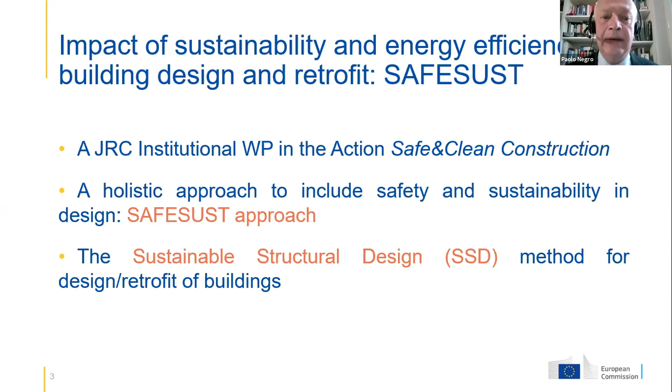Also, we developed what we call a Sustainable Structural Design method, SSD, to combine sustainability and seismic safety in the design or rehabilitation of buildings.

Everything moves from the availability of life cycle analysis techniques. I will not spend many words on the importance of life cycle analysis, because I noticed that Professor Toenti will cover in detail the impact of our industry on the environment.

Dealing with life cycle analysis means using a set of tools which are readily available to label the result of our design, our building, in terms of environmental performance.

The key issue as for LCA procedures is that they are all based on different criteria. There is a general lack of interoperability between the different criteria. Applying those procedures is somewhat long, requires a lot of expertise, and I might claim it is difficult. And more importantly, the application of LCA procedures is done a posteriori, at the end of the design process.

You design your building, and finally you run your life cycle analysis, and you get your label in terms of performance. If you have done a good design, you might be a gold designer or even platinum design. Differently, we stick with a silver label. This is not suitable for design.

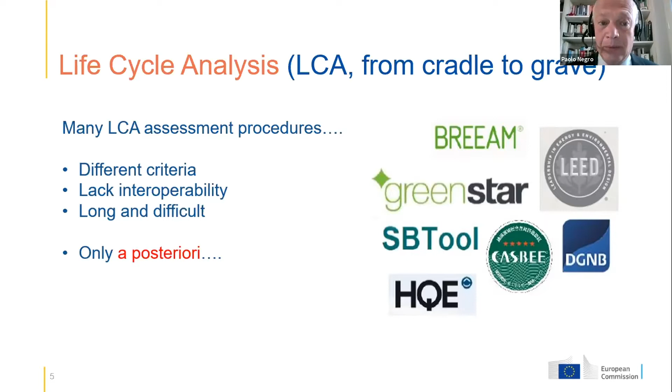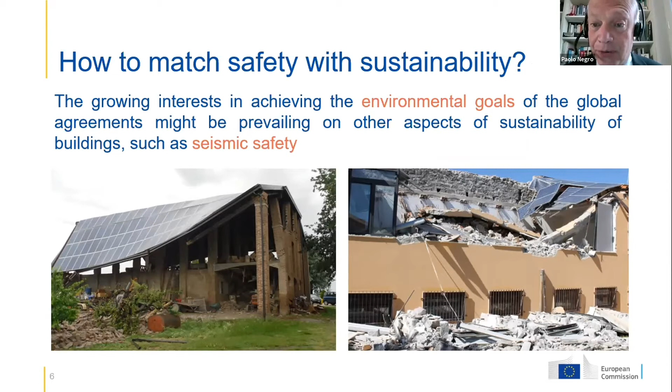Why? Because this stress on environmental performance might hide some typical aspects of structural design, and seismic safety is one. There are many examples around the world of rehabilitation of buildings in terms of energy or environmental performance, for instance, by placing solar panels on the roof, resulting in a disaster and a waste of resources as an effect of a seismic action. So what would be the correct procedure for integrating environmental issues and structural safety?

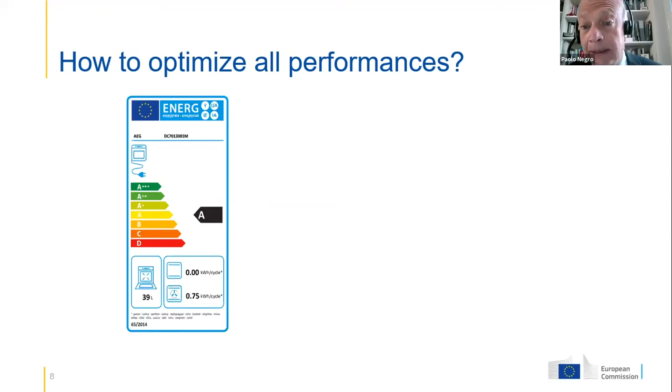Typically a designer ends up with a design of a building structure, including architectural aspects, and then he or she might check the environmental performance, which might not be fully satisfactory. Then in principle, one should go back and look for a different design solution for better performance in terms of environmental issues, but it might not correspond to the smartest solution in terms of structural behavior. So what do we do? Our aim is to integrate the two procedures to optimize all performances at the same time.

We move from the idea that owners perfectly understand the importance of energy performance. Why? Very simply because better energy performance corresponds to lower operating costs. So cost, that's the main issue in our approach, is the parameter which is mostly understood by all people involved in the project.

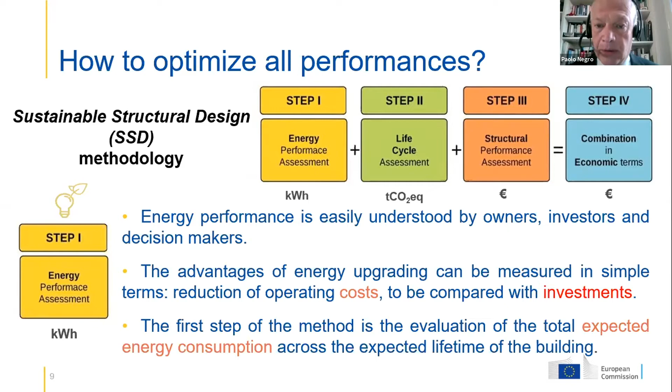This will guide us in describing how this sustainable structural design methodology works. The first step is the evaluation of the energy consumption expected throughout the operation of a building. The idea is to define a cost also associated with the structural performance.

Sounds crazy, but it is indeed well connected to the performance-based design approach, a procedure I'm sure is familiar to all of you. The first use of a performance-based approach was launched in California by the so-called PEER method. It is a fully probabilistic approach, and it clearly defines all the ingredients of a method. However, I'm sure you join me in saying it is far too complicated to use in day-by-day design.

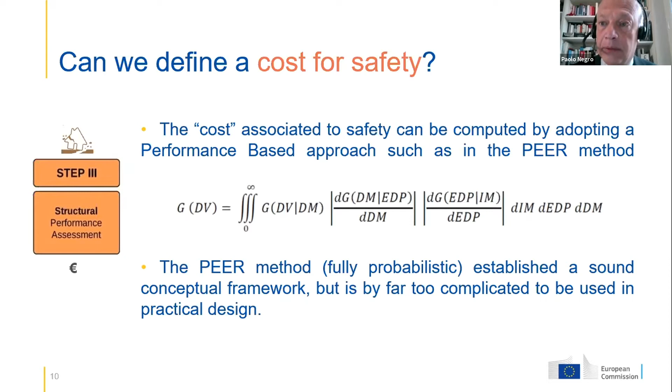So our idea was to propose a simplified performance-based approach. How does it work? It is divided into 4 phases. One first defines the limit states, which are the typical ones of earthquake engineering: low damage, severe damage, and so on. And at each limit state, a corresponding cost for repair is connected.

The limit states are typically defined in terms of interstory drifts. Then we connect these interstory drift values to the corresponding PGA, the peak ground acceleration, corresponding to the drifts, in the definition of a seismicity provided by the code.

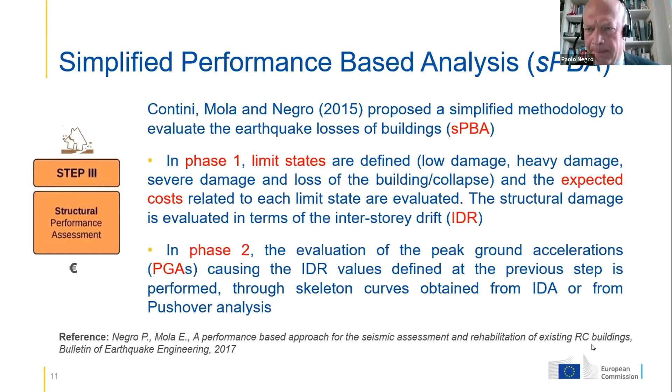And multiplying those probabilities of exceedance times the corresponding cost, the sum of all these costs corresponds to the expected total cost during the lifetime of a building. The procedure is pretty simple, can be worked with a simple spreadsheet, and allows for the definition of the total expected cost to be compared with the cost of construction or rehabilitation.

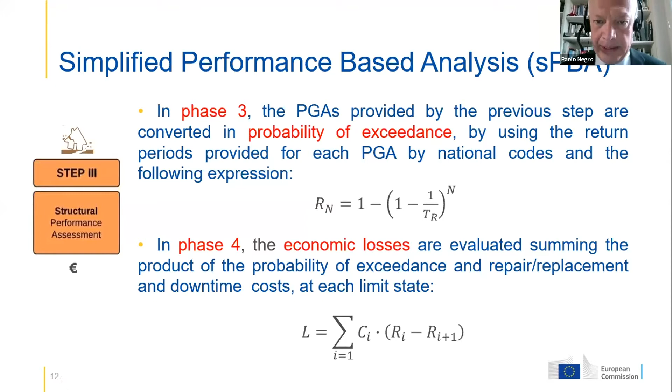Doing so, we can associate to our design solution a total cost in terms of expected total energy for operating the building, cost of economic losses, which might include all the repair and substitution after seismic events, to be compared with the cost of construction. What is missing?

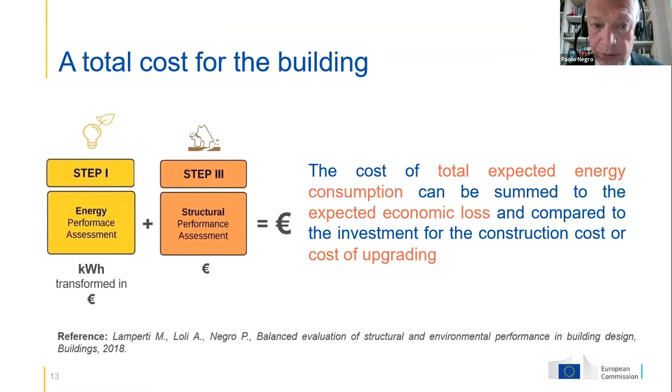Sustainability in principle should be already taken into account, since energy performance is somehow related to the environmental behavior of a building. Lower consumption of energy corresponds to a lower production of carbon dioxide to be put into the atmosphere.

But that's not all. We all know sustainability also relates to a wider definition, like a life cycle analysis, and there are some terms which might be disregarded so far, like the embodied energy - the energy associated with the material, the construction itself, the consumption of raw material - and all the LCA components associated not only with operation, but also construction, repair, and finally demolition of a building.

How important is this component? Typically, it is in the range of 5 to 10% of the total environmental impact corresponding to the operating of a building. However, we all know the aim is a future of nearly zero energy buildings. In such a situation, this component related to embodied energy might become dominant, so it should somehow be taken into account.

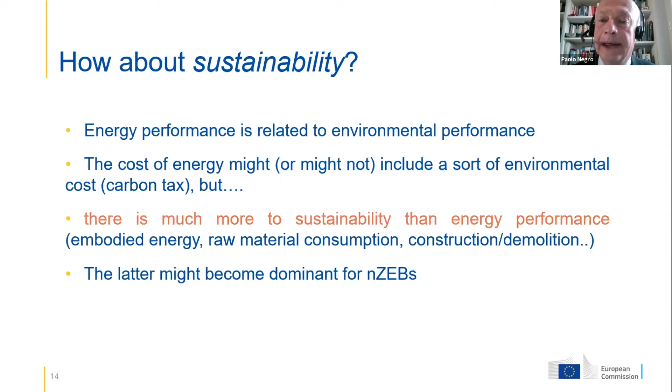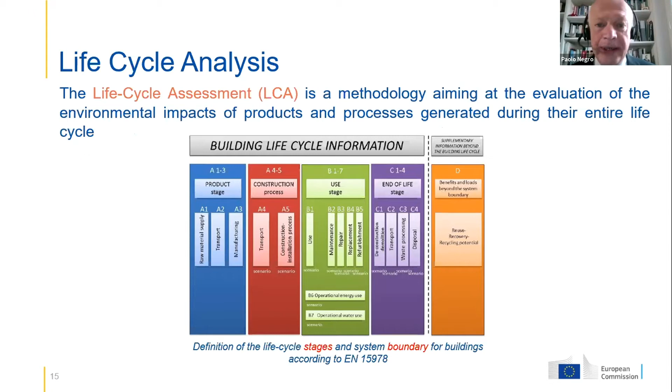Let's go back to life cycle analysis then. We all know how it works. It's a matter of defining stages and boundaries and applying a procedure to obtain a result from our calculation, which for most, unfortunately not all, components is expressed in terms of equivalent carbon dioxide emissions across the whole life cycle of a building. So running an LCA analysis would result in a number which is the total equivalent CO2 corresponding to the construction, operation, and final demolition of our building.

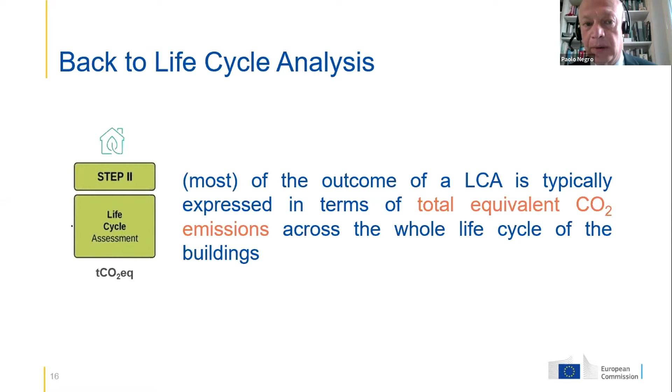So how can we obtain a global performance indicator then? Well, we said the result of a life cycle analysis is an amount of total carbon dioxide, and the operation and construction of a building can be expressed in economic terms. Comparing carbon dioxide and monetary values corresponds to comparing apples and oranges. So we should look for a way to combine the two components.

The idea is very simple, and I'm proud to say it corresponds to a very strong statement by the President of the European Commission: carbon must have its price. We should be able to associate an economic value to carbon dioxide emissions.

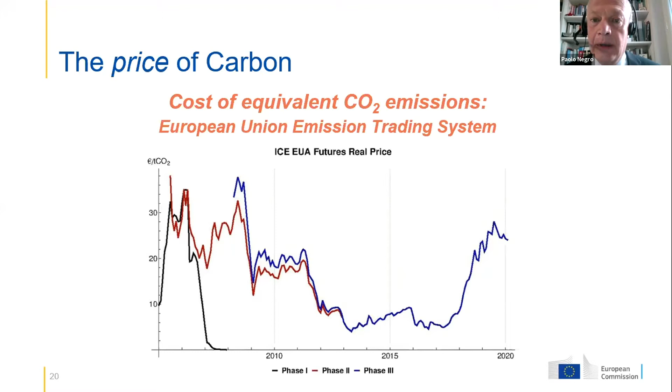And indeed we are - there are already existing markets for carbon. This is the variation of the European Union Emission Trading System. There are many others, and as you can see, it has very different values over time. It moves from as low as 5 euros per ton, and it is nowadays about 30 euros per ton. We might imagine a situation in which a realistic value should be attributed to carbon emissions to accurately measure the environmental impact of emissions. Waiting for that, we can explain how to take that into account.

I will show you how to do it by reference to a pilot application to a building. The building is a 3-story structure, which was tested in our European Laboratory for Structural Assessment. This mock-up was ideally transformed into a real building, an office building in this case, to be located in a particular site.

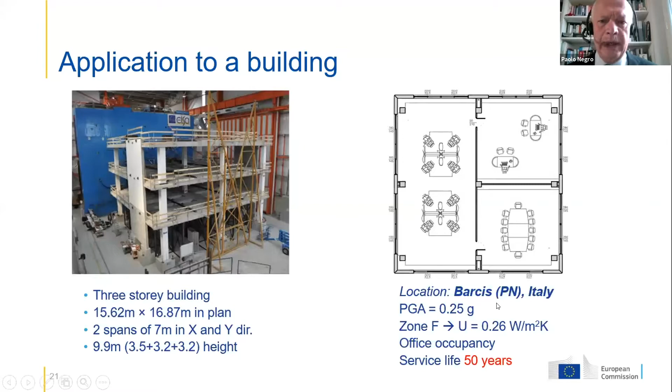characterized by its seismic action. We worked on 2 different design solutions, one of which was the precast solution, which indeed corresponded to the mock-up we tested in our laboratory, and a sort of cast-in-situ equivalent, defining all the occupancy requirements and also the architectural and functional solutions for curtains, flooring, floor systems, and so on.

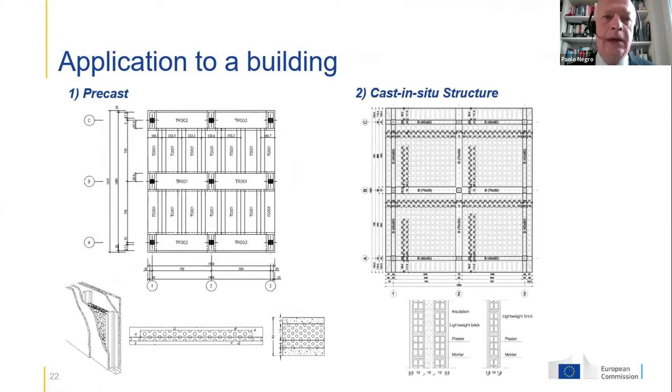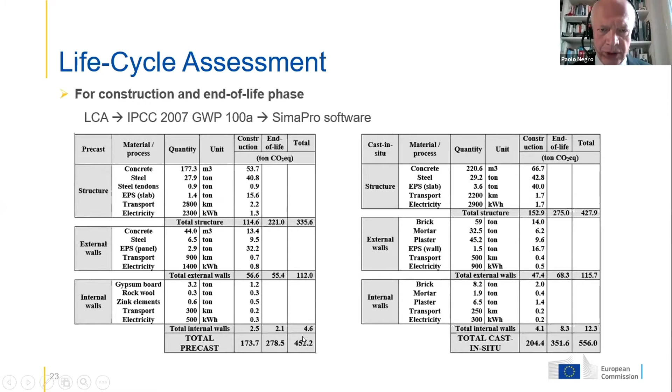The first step was to complete, by means of a SimaPro software, the impact of the 2 solutions in terms of equivalent CO2 emissions, and you see the final values in this table.

It is also interesting to look at these values by comparing the importance in terms of CO2 emissions as for the different components: internal walls, external walls, and structure.

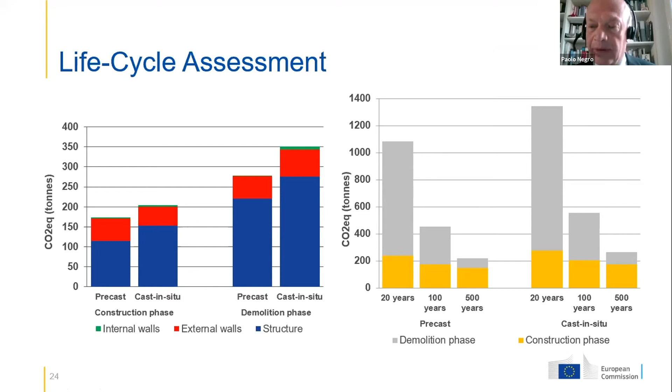It's also worth noting that at the end of the day, the value is strongly influenced by the lifetime we have in mind for our building. The expected lifetime was 50 years for this case, but having a shorter or longer lifetime might impact dramatically the environmental performance, which does not come as a surprise.

The other step was to evaluate the energy performance corresponding to the solutions, with calculations in terms of total electricity and gas consumption throughout the 50 years of expected operation of a building.

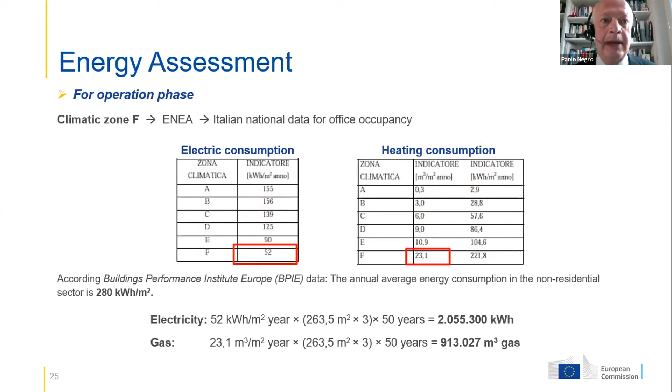Finally, it was necessary to apply this simplified performance-based design to work with structural assessment. Let's see in detail how it works.

The initial cost is simply the cost of construction in this case, which was done in our case being kind of theoretical by using a European material inventory.

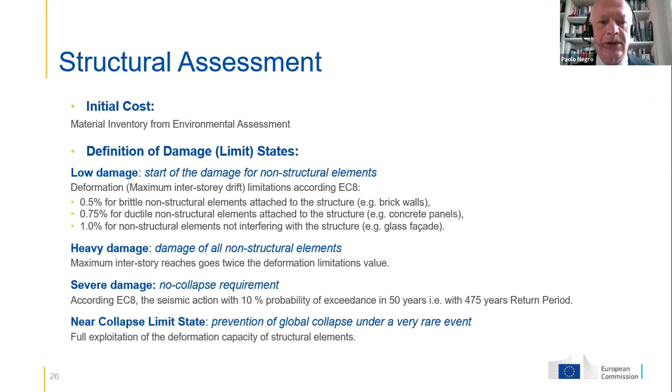The damage was defined with reference to the Eurocode, having in mind the behavior of partitions mainly for the lower damage states. So we set an interstory drift limit corresponding to the damage of non-structural components, which might have to be repaired or replaced after the expected seismic event, as well as the more traditional damage limits corresponding to heavy damage, severe damage, and life safety.

By using the monotonic curve, we were able to associate each interstory drift corresponding to the limit state to the corresponding peak ground accelerations for the two structural solutions being analyzed, and then jump into the definition of seismicity provided by the code, in this case the Eurocode and the Italian code for seismicity.

The Italian code provides a formula which allows us to obtain the return period for each peak ground acceleration value. Once one has obtained the return period, this formula is used to obtain the probability of exceedance corresponding to that return period. Again, it is a set of calculations which can be done by means of a simple spreadsheet.

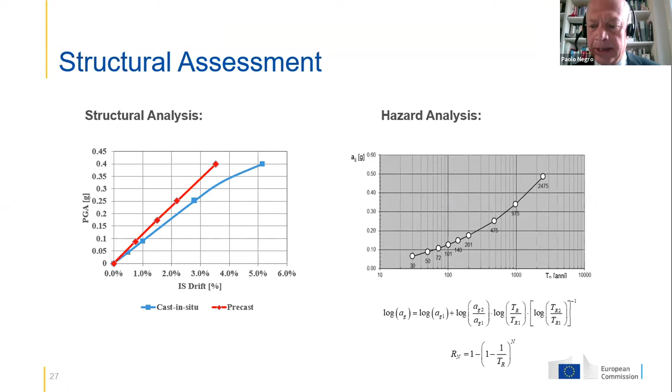The results are expressed here. For each limit state, you have the corresponding peak ground acceleration, the return period, and the probability of exceedance corresponding to that return period.

The damage cost has to be defined by the engineer, eventually under consultation with the owner or the investor, because it might also include some sort of downtime considerations. By multiplying the expected probability of exceedance times the damage, one obtains the loss corresponding to that limit state.

By summing up all these expected losses, one may obtain the total expected loss throughout the lifetime of a building. This was done for the precast structure as well as for the cast-in-situ structure.

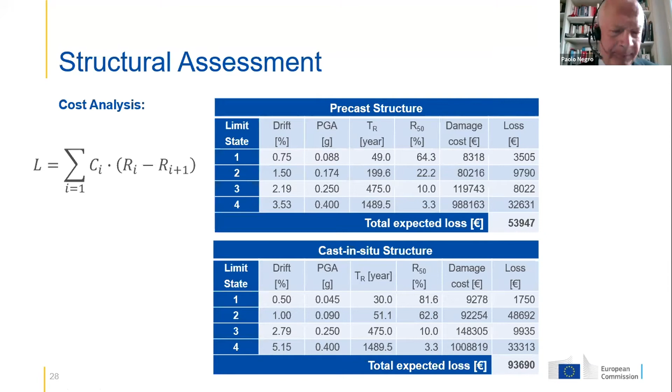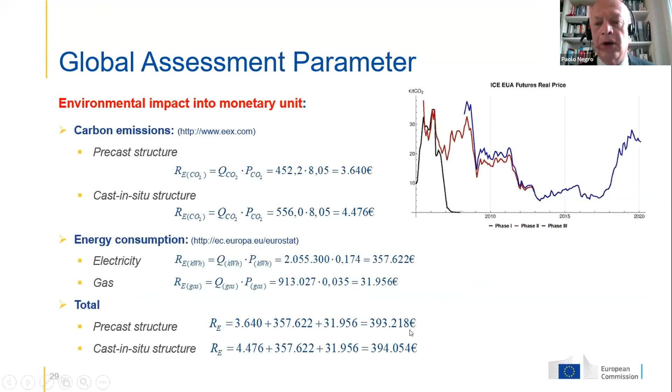Moving toward the global assessment parameter, we try to combine all the environmental impacts, meaning the carbon emissions that we have defined before, by computing the expected consumption and multiplying by the unitary terms—the energy consumption, the gas consumption—and summing up the energy consumption and the carbon emission, we obtain the values of the equivalent cost of the total environmental aspects.

Then it is just a matter of summing the different components and obtaining the total expected cost for the two structural solutions, precast and cast-in-situ.

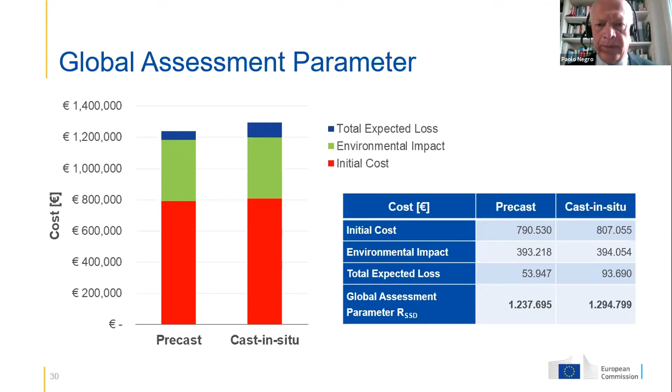I mean, what is the structural solution which is most efficient in monetary terms for both environmental and structural behavior. We believe that the beauty of this approach is that it frees, for instance, structural engineers from having to deal with difficult calculations such as the application of life cycle analysis tools.

Why? Because being expressed as an ultimate value in terms of monetary values, it is perfectly conceived for allowing for the interaction of different aspects.

The structural engineer might be able to do his job and provide the corresponding expected construction cost as well as the expected damage losses during the lifetime of a building. Whereas other specialists, such as MEP engineers, might concentrate on the functioning of a building and provide the performance of the building in terms of expected operating cost for heating and cooling.

An LCA expert might be able to run a simulation tool to provide the equivalent total carbon dioxide emission and then the corresponding environmental cost. A simple sum of these values may be put in front of a stakeholder, or the owner might drive the consortium of specialists in devising what the best solution is.

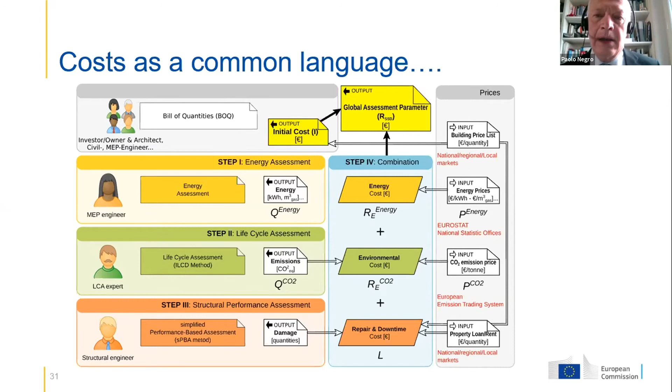This approach is also powerful because it might be applied at different scales, and indeed we try to do that. A typical problem in addressing situations like the existing building stock in Europe has immediately to face the issue of limited resources in front of a very old existing building stock. So some planning choices have to be devised.

This tool, by sticking to category of buildings, might be applied to define where it is more important to intervene first. Again, by using a monetary parameter associated to class of buildings, which can be easily understood by all operators, including stakeholders and local authorities.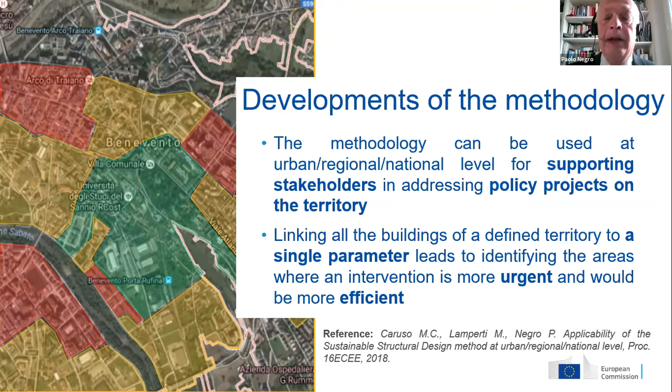Another strength is that it was not conceived for earthquake engineering alone, mostly for very clear reasons. The performance-based design was conceived in this cultural environment. It has no restrictions as for application to different structural issues. We might associate the behavior of buildings, structural safety in general.

Nowadays, there are many examples of situations in which existing buildings should be upgraded as for higher loads requirements, or we might consider transformation and reuse of classes of buildings which were designed for one function and should be transformed for different functions. There is an increasing sensitivity to issues related to maintenance of structures, and this is the perfect framework to conceive the structure which is most efficient also in terms of lower expected maintenance costs.

Fire resistance could also be included, and all the effects of climate change will have one day to be included in our considerations. To that extent, I might mention a recent workshop in which this idea was applied to the safety of buildings with respect to actions different from earthquakes, specifically the risk of global collapse due to local failures induced by explosions. You might wish to refer to the proceedings of this workshop.

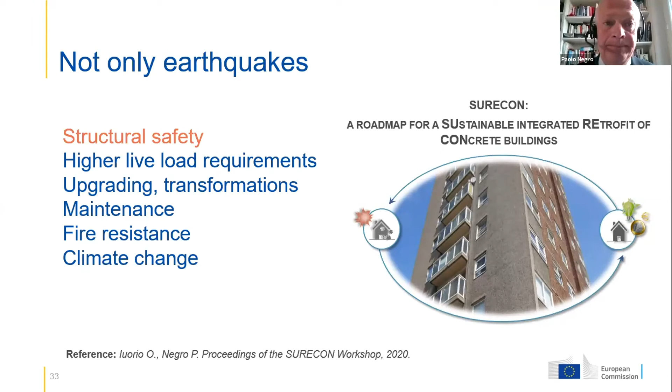Then I will move to a more recent activity, which is currently being performed by the Joint Research Center by direct mandate of the European Parliament. It is an activity conducted with the assistance of a number of European experts.

This project has a scope, and the scope was attached to this project directly by the European Parliament. The scope is to define solutions that, at the same time and in the least invasive way, are expected to reduce seismic vulnerability and increase energy efficiency, so to obtain a lower environmental impact.

The main objective is to define tools and guidelines, and that's our technical effort, as well as to stimulate the use of integrated energy and seismic safety solutions, to create awareness all throughout the European scientific community, and at the end, by means of providing input to an action plan, increase resilience of the existing built environment.

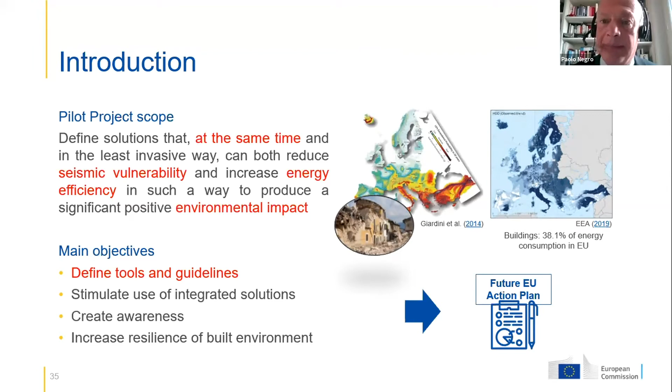It has a well-defined policy setup. It is immediately associated to the effort for the Green Deal and Renovation Wave, currently active in Europe. It relates to the Directive for Energy Performance in Buildings.

It has a strong industrial performance defined by the new industrial strategy for Europe and the new European Circular Economy Action Plan. In our intention, it will fully comply with the action plan for the Sendai framework, particularly as for goal 11, sustainable development.

And finally, being designed for the European territory, we keep one eye on existing structures which might have a value as for European culture. Many old buildings in Europe are part of European cultural heritage.

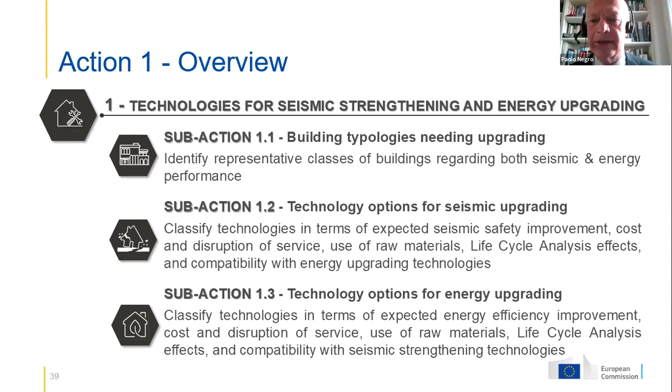As for building typologies, a huge work of analysis of the existing building stock ended up with figures which are a bit worrying. A large portion of the buildings is very old and badly need upgrading.

We also identified the most typical structural configuration materials, and those are masonry buildings for many countries, but also reinforced concrete old buildings for a bunch of European countries.

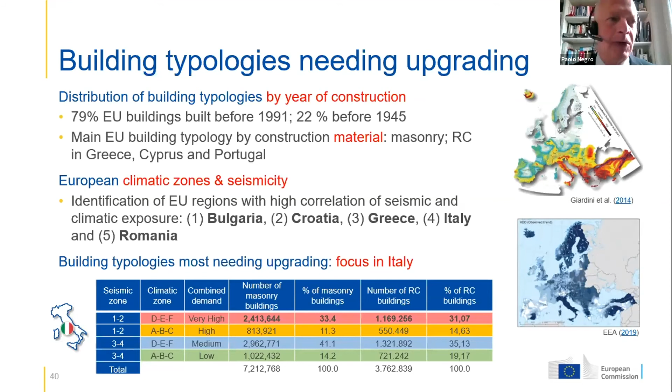We compared the climatic zones, and we ended up focusing on the most representative cross situation of seismic safety demands and energy demands, which ended up focusing on Italian territory as the most representative situation.

I will not spend much time on our classification of technology options for seismic upgrading. We are all familiar with them, but we are proud to have completed a comprehensive analysis in which all the economic components, cost of intervention, time of disruption, and compatibility with energy upgrading was attached to each one.

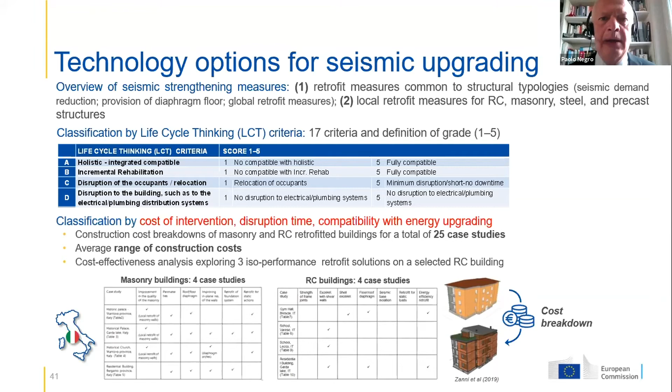The same was done for energy upgrading options. A complete review of existing independent options for improving the energy efficiency of buildings was carried out, and all these were classified and ranked somehow in terms of impact, but also, again, cost of intervention, disruption time, and in this case, compatibility with seismic upgrading.

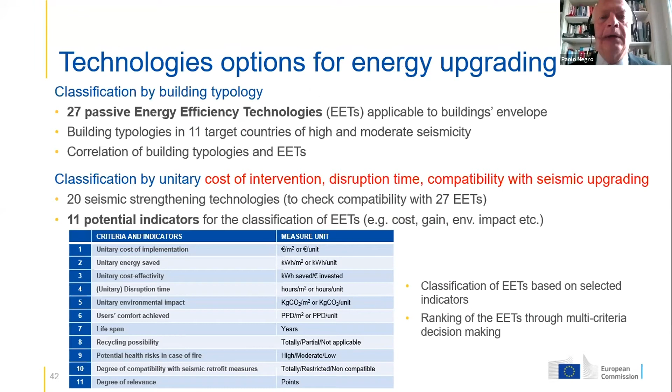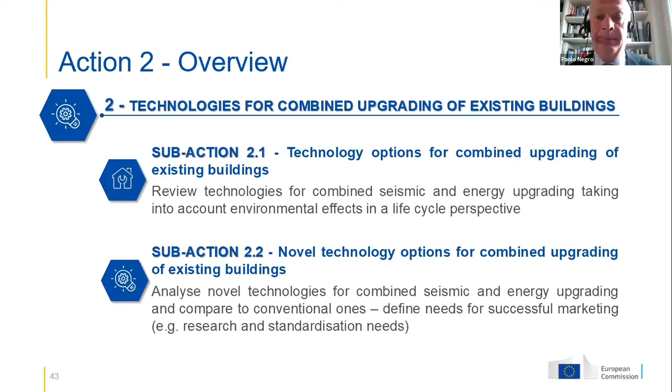An action was devoted to study existing methods for combined upgrading and also novel technologies and materials for energy upgrading. As for the combined existing methods, you see a bunch here. I cannot go in describing them.

A typical example is the joint improvement of existing reinforced concrete buildings by placing materials on the claddings to improve at the same time the energy performance and the seismic resistance. But obviously there are many other options more or less integrated.

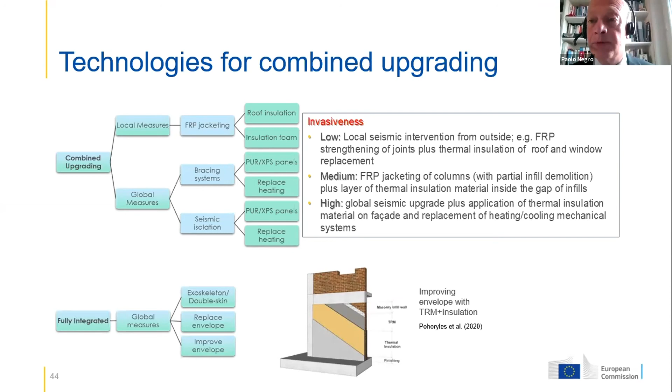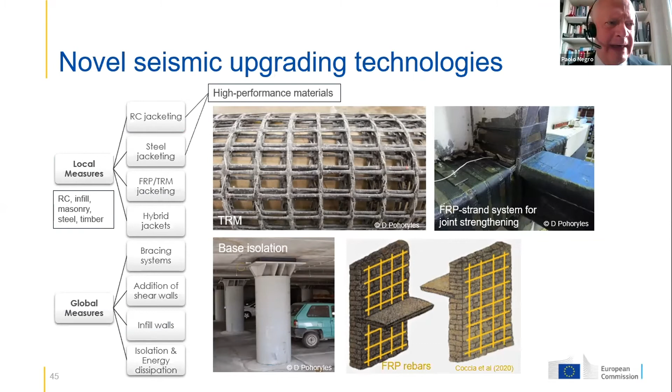Novel technologies were also studied, covering both local and global measures. And at the same time, we also studied potentially promising new materials and technologies, such as vacuum insulation panels, phase change materials, or gas-filled panels.

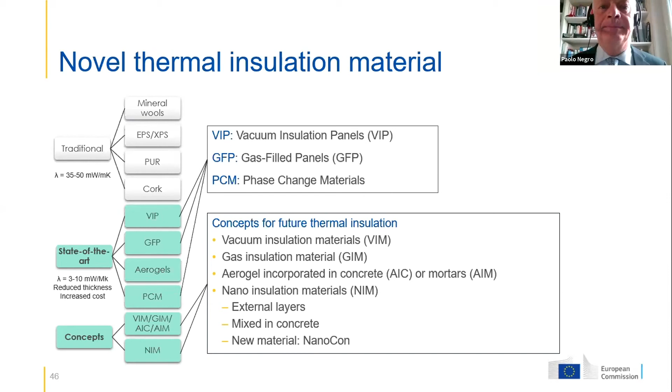But probably the most important action is the definition of the methodologies for assessing, to make the method I presented before available to a wider community of technicians. This has three actions: a state-of-the-art assessment of methodologies for combined upgrading, then a proposal for a simplified method, and a third sub-action, the identification of case studies and the application of the existing as well as a simplified method to practical upgrading.

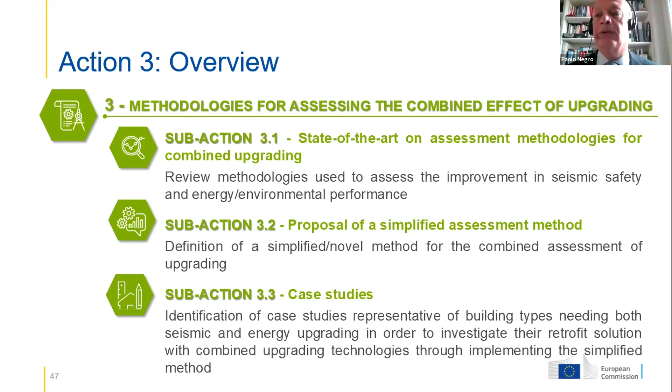As for the state-of-the-art of the assessment method, the work done was a classification of all the existing methods to cover the component of seismic vulnerability, environmental assessment, sustainability, and combined. We stressed the importance on considering anyhow the cost of interventions, and the conclusion was that indeed only the SSD method I presented before is currently available to achieve this goal.

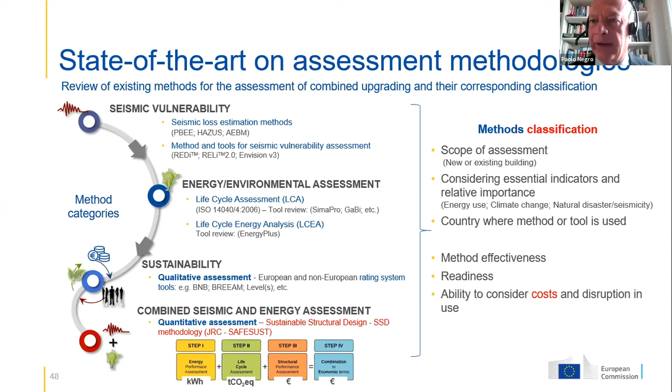The proposal of a simplified assessment method is underway, so I will not be able to tell you more details about this. It is based on the idea of conceiving a simulation box, which has to be populated by preliminary studies and finally to be used by the designer in assessing in a simple way the result of his or her design.

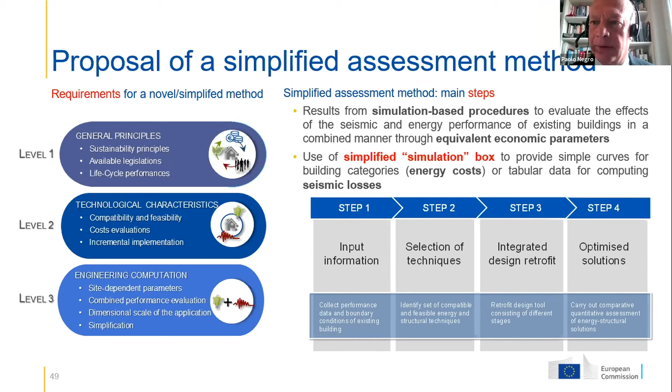It will have again three components, one related to seismic performance, one to energy performance, and one to environmental performance, by defining the corresponding expected structural losses, the estimated annual cost of energy, and the expected environmental impact, again to be combined and given as a final result of a design process for deciding about the efficiency of a design process.

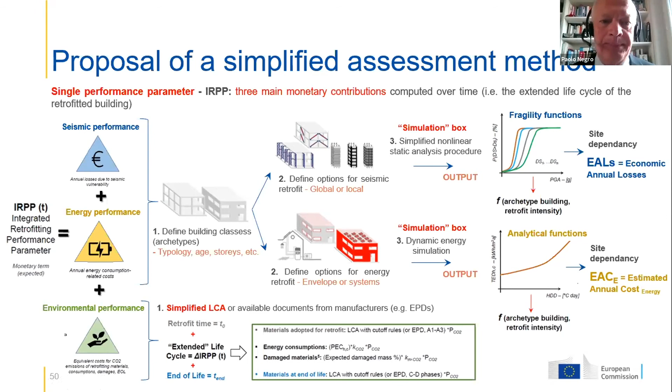At the same time, we're running case studies with European significance. We identified a number of structural situations for existing buildings, which we claim have the capacity of covering somehow the problems which might be faced in all the European territories.

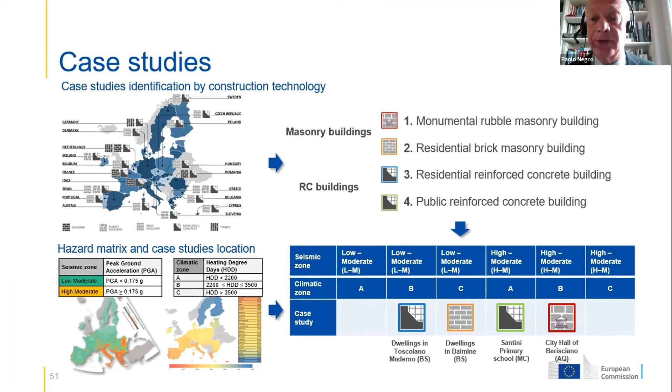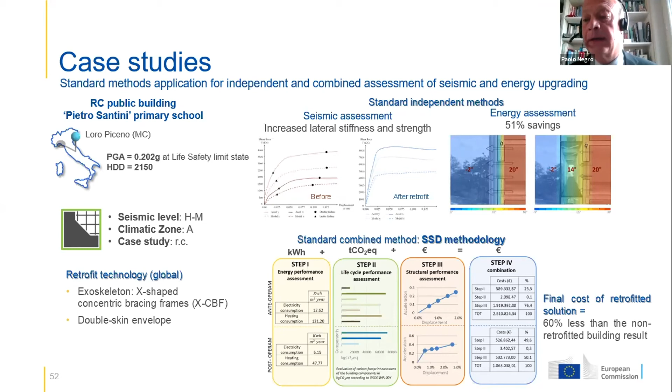The study is in progress; so far we didn't yet apply the novel simplified technology, but it is interesting to notice that the application of existing methods, the SSD methodology, corresponds to significant reductions in terms of total operating and environmental costs for a typical building.

This ends my presentation, and I will be glad to answer any question, if any.